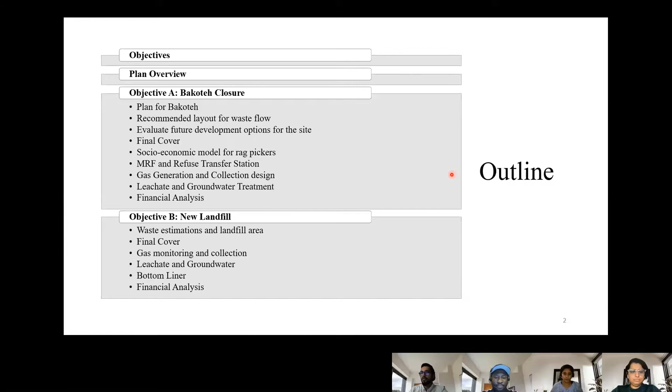For the Bakoteh closure, the most important things are the final cover, MRF station, and the refuse transfer station. The gas generation and collection design will also be considered. For the new landfill, we will have the bottom liner and final cover, along with the financial analysis for both of the objectives.

The major existing problem right now is the Bakoteh dump site, which is detrimental to public health and an environmental hazard. It's a 45-acre dump site, which is a breeding ground for mosquitoes, and two weeks before there was a huge fire on the open dump site.

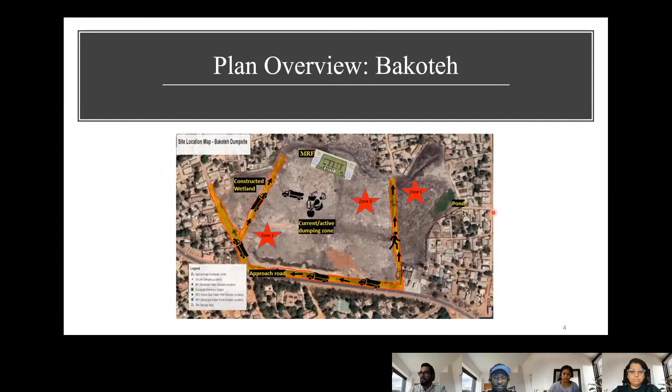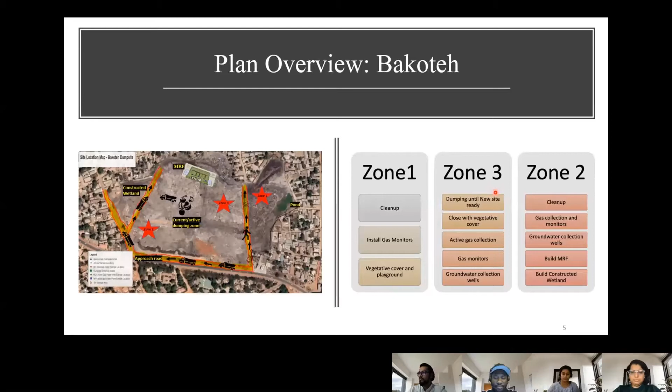In the plan overview, Bakoteh has been divided into three zones, Zone 1, Zone 2, and Zone 3, where in Zone 2 we are thinking to construct a wetland and material recovery facility, and for the existing active dumping zone, we are thinking to cover it and have a gas collection system. In Zone 1, cleanup is necessary along with installation of gas monitors. For Zone 3, we need an active gas collection system and monitoring wells. For Zone 2, we need to develop a constructed wetland and material recovery facility.

Tambana is the only feasible option for us to develop the landfill site, though it is just a 12-acre landfill site. We will be covering the design options in the subsequent slides.

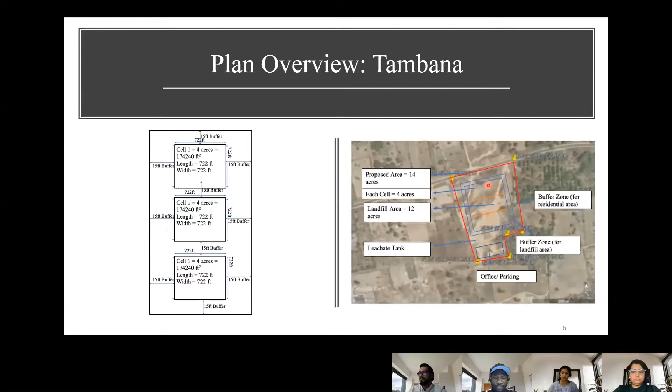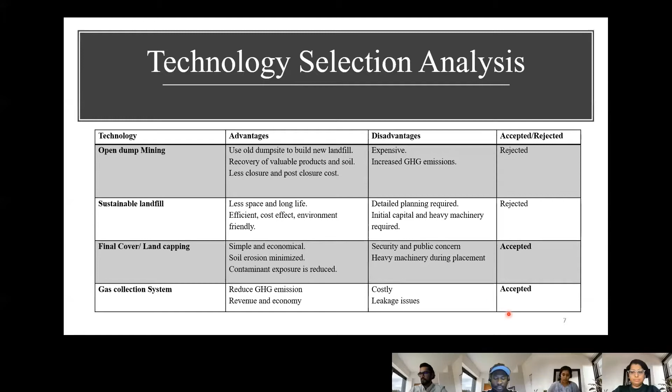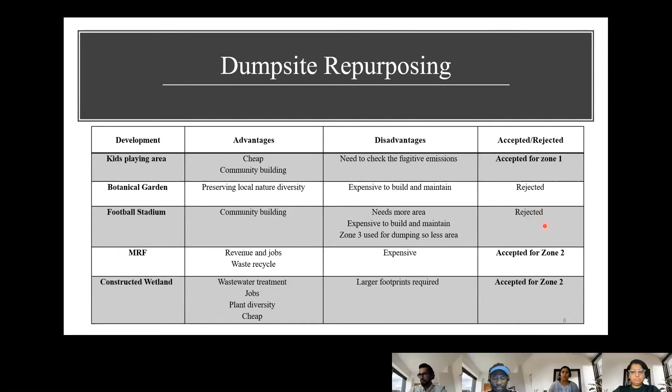Four main technologies were considered on how to use the land after closing the Bakoteh dump site. We considered open dump mining, the sustainable landfill option, a covering or land capping system, and the gas collection system. The land capping and gas collection systems were finally accepted for the Bakoteh dump site. The existing dump site is also going to be repurposed into a kids playing area, a material recovery facility, and constructed wetlands. A botanical garden as well as a football stadium were considered, but we did not accept them for the final procedure.

The final cover of Bakoteh is of great importance. The primary reason is that the existing Bakoteh dump site does not have any leachate collection system. It also does not have a bottom liner. So if water infiltrates through the cover and reaches the waste, leachate is produced and it will lead to contamination of the groundwater below the dump site.

In order to avoid that, we are providing a sophisticated final cover, which includes 6 inches of topsoil and 24 inches of protective layer, a geotextile filter with a geonet drainage layer, a geomembrane, and also a geosynthetic clay liner above the foundation or gas vent layer. It could be costlier, but our primary importance is to avoid any infiltration into the dump site.

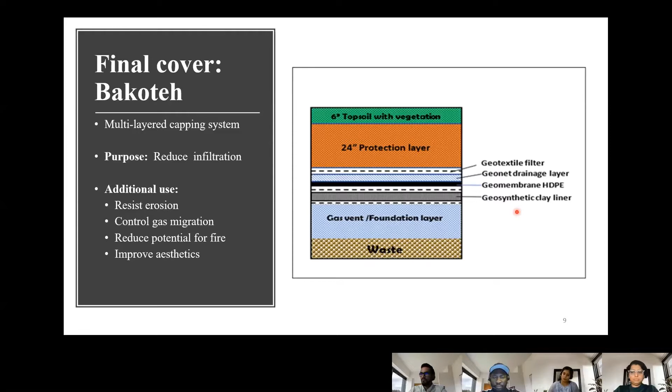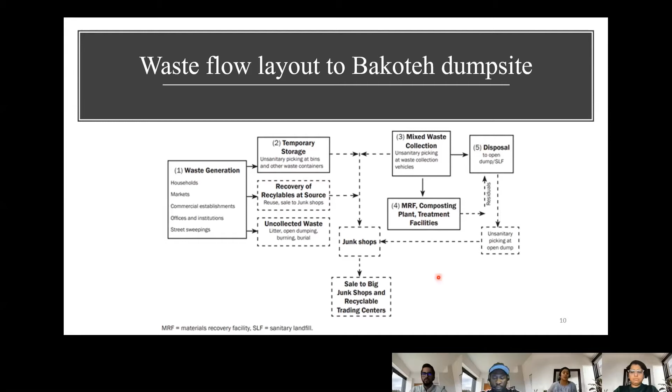The waste that goes to the Bakoteh dump site is mainly stored somewhere as temporary storage, or some rag pickers take it and recycle it. It finally goes to the junk shop, and some of it will be handled using the MRF, whereas the rest will be dumped in the open dump site as of now, and later, when we move to Tambana, it will be dumped in the landfill.

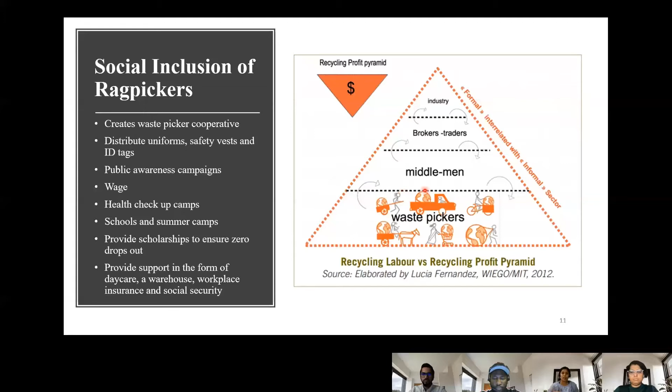It is important to consider the rag pickers who will be displaced when Bakoteh is closed forever. Social inclusion is important because the waste pickers or rag pickers are the people who actually work on the ground picking up and differentiating all the recyclables. It is important to give them cooperative societies or proper healthcare facilities because they are at the bottom of the recycling profit pyramid, whereas they do the most work.

As Ketan discussed, we are planning to have a material recovery facility in Zone 2. The material recovery facility not only helps in sorting recyclables and non-recyclables, it also provides jobs for the rag pickers who will be displaced from the open dump site.

The major portion of the recyclable waste like paper and cardboard could be separated by hand sorting, and we will also be using a trommel screen in the material recovery facility. Later on, when we have more funding, we can add more machines to achieve more fruitful or 100% sorting and recycling of the waste.

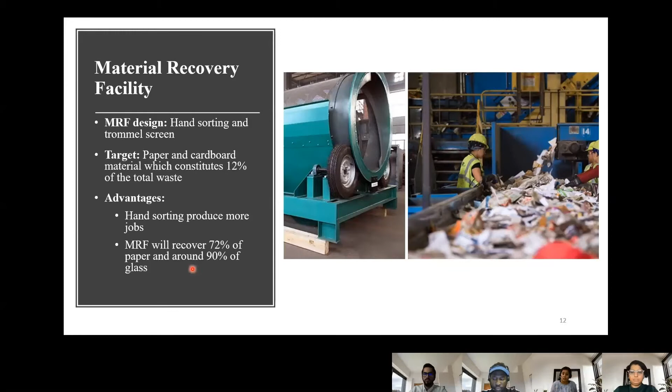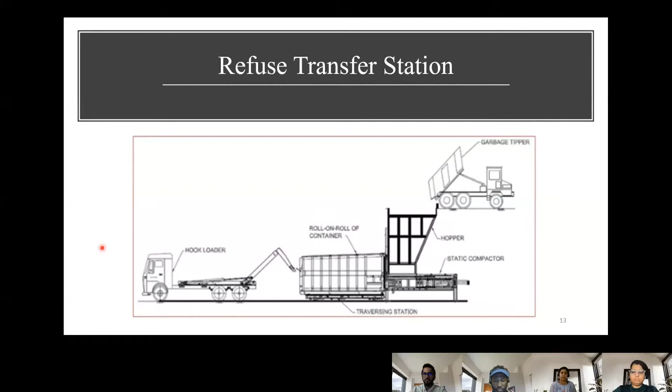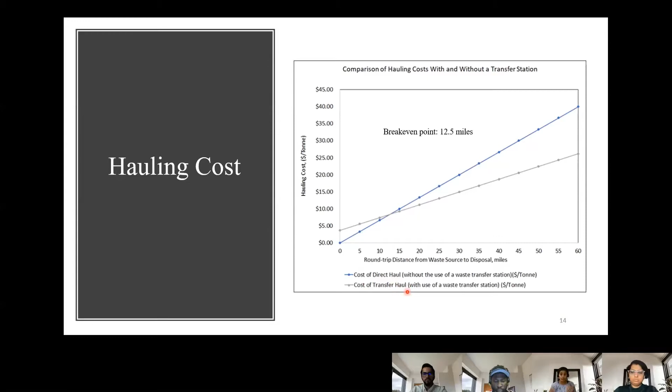Hauling cost is the most important point in deciding whether we require a transfer station or not. The break-even point is 12.5 miles, and from our calculation, the distance between the area of generation and the area of disposal is much greater than this, so we are in need of a transfer station.

In alliance with what my colleagues have said, since gas collection is acceptable at the Bakoteh dump site, we are going to implement a gas collection system. But in order to do that, we need to understand what's going on.

When municipal solid waste decomposes, a huge amount of gas is often generated through a biological process where microorganisms decompose it into carbon dioxide, methane, and other gases. Collection of these gases helps prevent explosion. As my colleague Ketan mentioned, there were fires in the dump sites some weeks ago.

This can be avoided if gas is actively collected, reducing our chances of fire and other fugitive emissions. If these gases are collected, they have to go through a processing facility where toxic gases and gases not useful for energy recovery can be taken out of the gas stream, leaving only methane present at a high purity level.

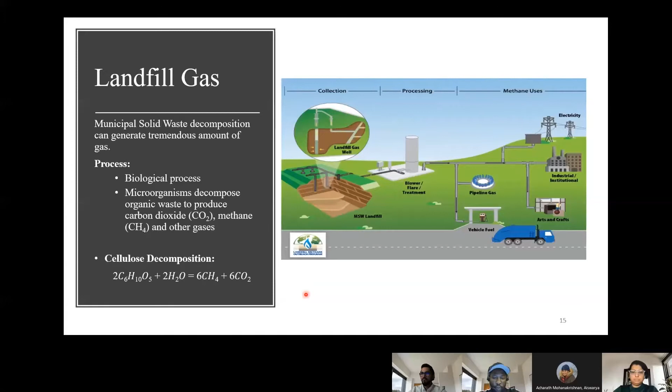Moving on, we have done the gas estimation, calculated for the first year, and also calculated post-closure. We went ahead and calculated the gas estimation rate for 2020, then 5 years after that, which we believe is when the landfill will be closed, in 2025, and then calculated the gas generation rate.

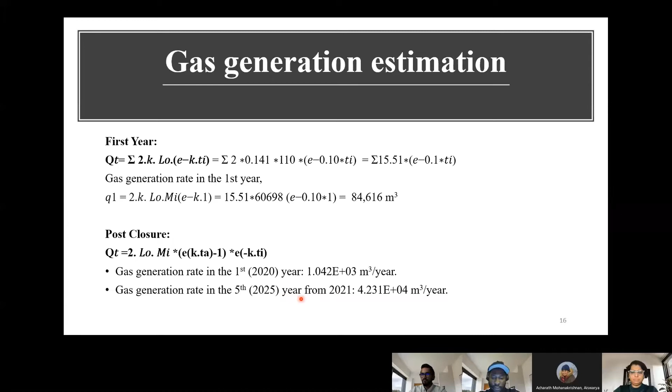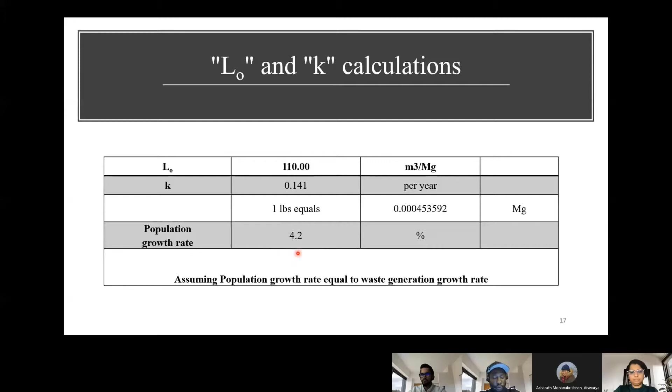We used these factors: the methane generation potential and the methane generation rate constant, along with the population growth rate of 4.2%, which was also used as the waste generation rate.

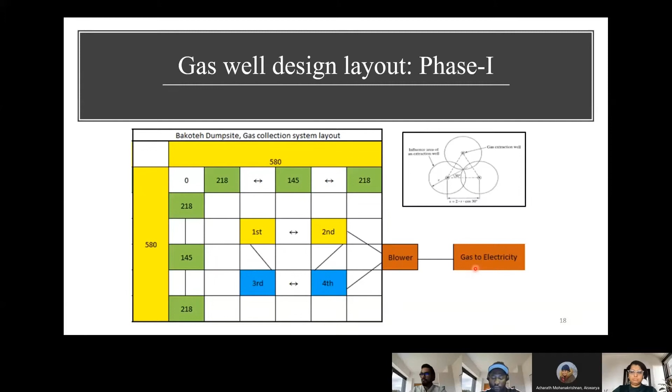We require a buffer zone of about 218 feet. Overall, we designed to put in 8 gas wells, installed in 2 phases: 4 gas wells in the first phase at zone 1 and 2, and then 4 gas wells installed at zone 3 after closure. All these wells will be connected, and gas will be collected from each well and passed into the blower, which can be sent into an energy recovery facility, used to generate electricity, or flared if needed.

For the leachate, we are thinking of constructing a constructed wetland at Bakoteh dump site. The reason for selecting that is because there is a large area in Bakoteh, and the only issue with a constructed wetland is the need for a large area, which we have at Bakoteh.

We do not need to send our leachate or groundwater for treatment to a private lab, thus saving expense. And as Aishwarya mentioned before, it will also generate work for the workers there, so the rag pickers who are getting displaced are going to get work there.

The water produced out of the constructed wetland would then be distributed over the vegetative cover, so we are going to recycle water. Since it's a self-sustaining system, we are going to save money on operational cost as well. It's a very inexpensive solution to this problem.

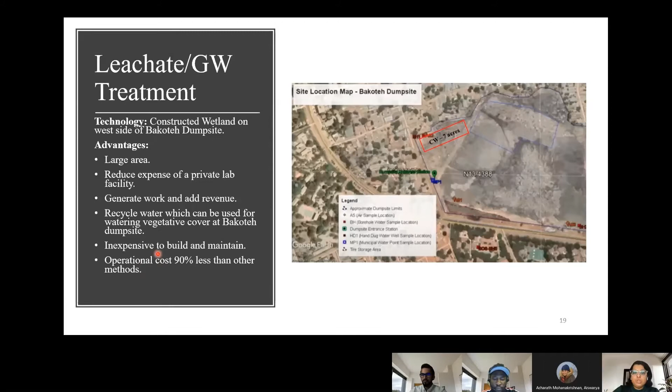Moving on, the wetland design is now being considered for 7 acres, but once the middle section of Bakoteh is closed, we can think of expanding it. For now, we are considering zone 1 and 3, which are the aerobic zones, with 2 days of HRT, which is the hydraulic residence time.

For zone 2, we are thinking of 25 days of HRT, which is the anaerobic zone. For the plants in zone 1 and 3, we are thinking of vetiver grass, and for zone 2, we are considering cattail and papyrus, which are very common in the Gambia region, so it does not add to the cost.

Coming to the groundwater monitoring at Bakoteh, we cannot build the LCRS system, which is the leachate collection removal system, because Bakoteh is already filled, and also there is a possibility that the groundwater there is contaminated.

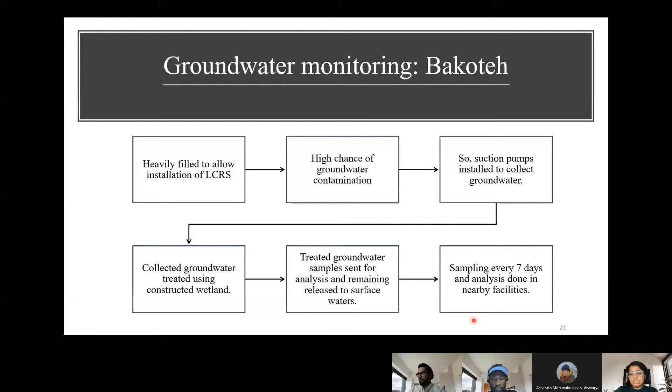So the plan is to pull out the groundwater using suction pumps and then treat it at the constructed wetland, and then take a few samples of that to a nearby facility. After the treatment, we will also take some samples and send them to the nearby facilities, every 7 days.

For the leachate and groundwater quality analysis, as I mentioned previously, we'll be doing sampling every 7 days, and we'll be sending it to two facilities: one is Everpure Natural Pure Water, and the other one is SGS Gambia.

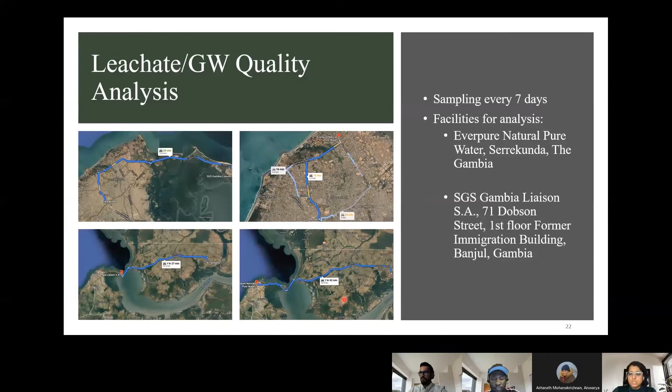Both of these facilities are about 16 to 28 minutes away from Bakoteh and about 1 hour 30 minutes away from our proposed site. So that's why we are going to select this west facility for both of them to treat the leachate and groundwater.

Moving on, if we talk about the financial analysis of the existing dump site, the major crucial aspect was the final cover, because we need to make sure that water infiltration doesn't take place. We also took care of operations, waste and daily cover, and other components like the gas collection system, wetland construction, and material recovery facilities, as my colleagues mentioned.

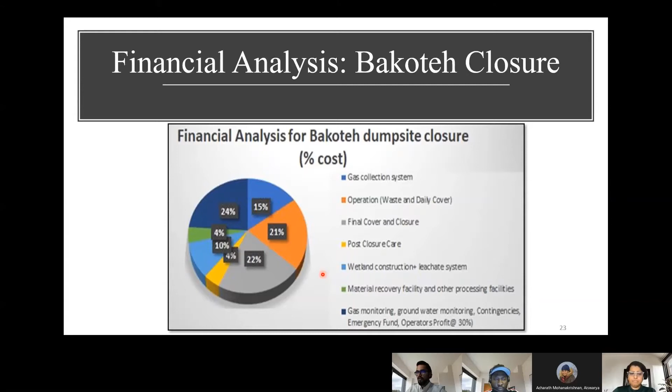The major chunk was 22% for the final cover and closure, and the individual unit breakup is as shown here. The total cost for landfill construction was obtained as $138.46 per square meter, and an overall ballpark value of $18.8 million was achieved. This was excluding the technology transfer fees, the cess, and government taxes.

If we talk about the Tambana landfill, where we'll be having the new development of the scientific engineered landfill, it is a new area, but the most feasible one right now, given the conditions of the Gambian region.

We started with the projection of waste generation. It's a decadal waste generation shown on the right side from 2001 to 2010, with a growth rate of 4.2%. The first year population we estimated as 1 million, and the area required is 48.4 acres.

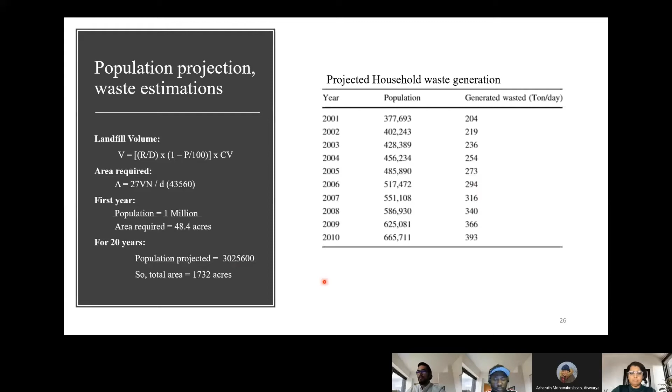Keeping this area requirement in mind, we are not sending all the waste to the Tambana landfill. We will be diverting waste to the material recovery facility as well as other processing facilities like vermicomposting and other biodegradation areas. For the next 20 years, the projected population is 3.02 million, while the total area required will be 1732 acres, and again diversion will take place.

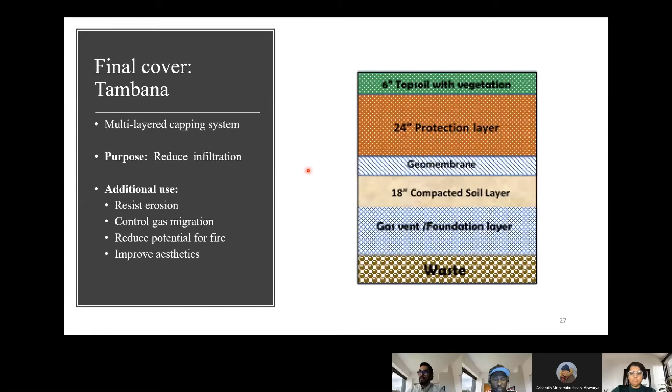If we talk about the final cover of Tambana, the most important thing is the geomembrane, and we are not having as thick a layer of geomembrane as we have in Bakoteh, because this is a sophisticated landfill and it will have a bottom liner as well as checks on leachate treatment and collection.

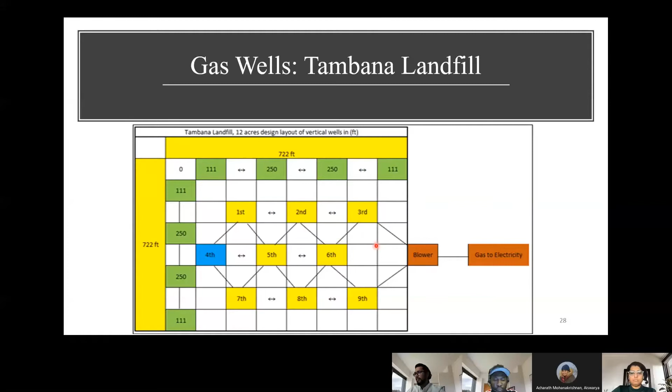If we talk about the gas wells, the Tambana region will have an area of 722 by 722 feet square. We're having a buffer of 111 feet, and there will be a total of 9 gas wells obtained based on the formula mentioned by my colleague OP. We will be collecting the gas to the blower, and the blower will be sending the gas to the electricity grid.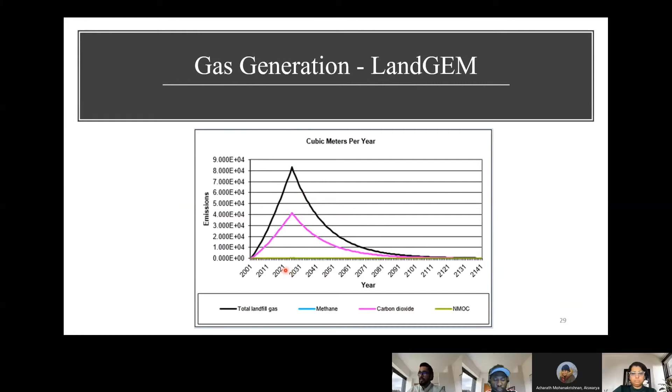If we talk about the landfill gas results, the overall gas generation came out to be 8 times 10 to the 4th cubic meters per year, which is a fair amount that we need to take care of, because if you see from the graph, in 2025 the methane generation is 50% of the total gas generation.

So for the leachate collection and removal system at Tambana, we are planning to build the leachate collection pipes parallel to the orange lines shown, and then there'll be a perpendicular line connecting to those leachate pipes and taking it to the leachate tank, which will be next to the office and parking, as shown in the image.

We'll be collecting the leachate using the sumps. We'll be storing it in the Tambana storage tank, and then transporting it to Bakote for treatment.

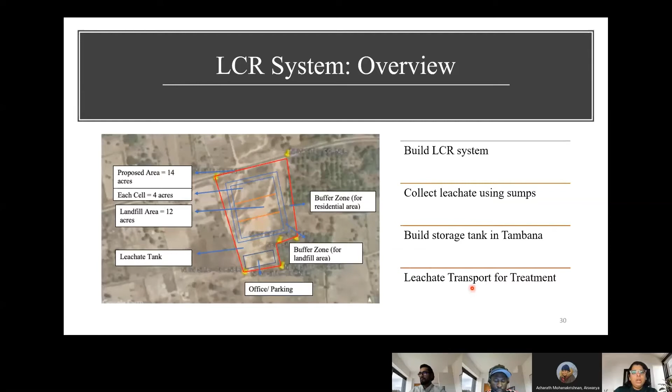For the leachate collection system, we have used two drainage layers: the GeoNet and the GeoTextile, with a leachate collection rate of about 60 gallons per acre. For the GeoNet, we'll be using a biplanar GeoNet design material which meets our requirements.

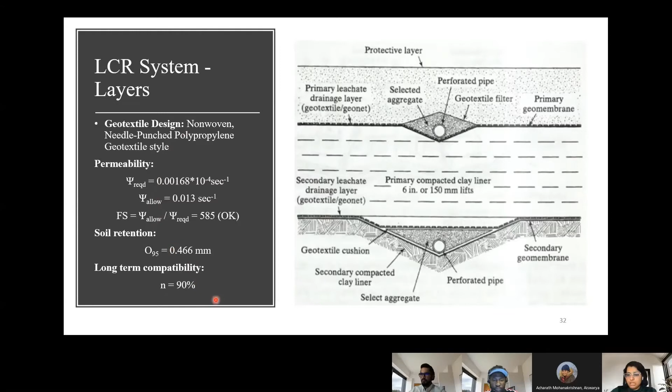For the geotextile, we'll be using a non-woven needle punched polypropylene geotextile style. It'll have a soil retention of 0.466, and a porosity long-term compatibility greater than 90%, which also meets our requirement.

Coming to the pipes, they will be placed on a sloping surface of 2%, and the pipes themselves will be placed at a sloping surface of 1%. The reason for doing that is it allows gravity to do its work for the free fall of the leachate to the sumps, and from sumps to the storage tank.

Thus, we do not have to use pumps to pump out the leachate and save money. We'll be using HDPE SDR 11 for the pipe material, and for the holes in the pipe, we are thinking of only one hole on either side, to maintain less than 12 inches of leachate head in the pipes.

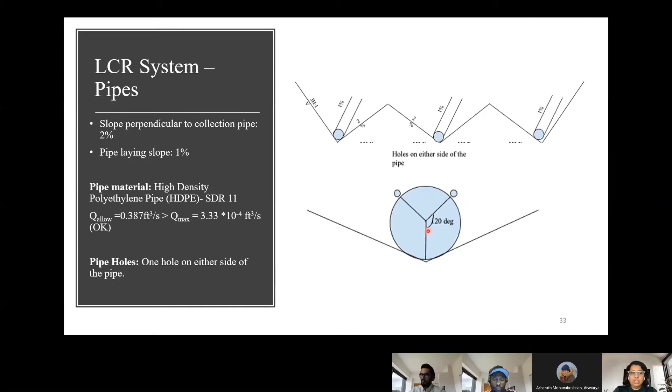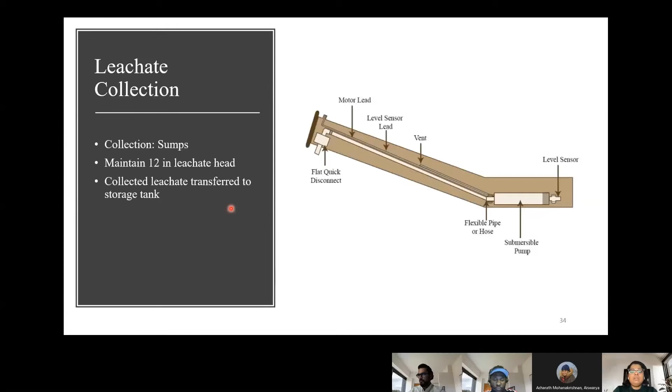For the leachate collection, we'll be using sumps which maintain the previously mentioned less than 12 inches of leachate head, which is a requirement. It will then transfer the leachate to the storage tank, which will be placed at Tambana.

For storage, we'll be using XLPE cross-linked polyethylene tanks, which are very durable, do not corrode quickly, and do not get damaged easily. We'll be using a 4,000 gallons capacity tank, and transport the collected leachate every 10 days using a septic truck with a capacity of 3,300 gallons.

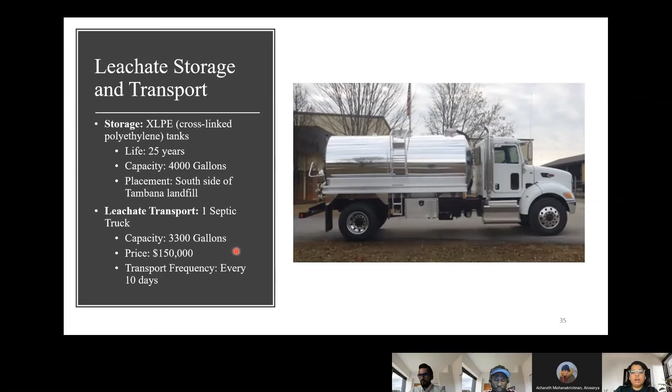We'll be using just one septic truck to save on cash. Since we are transporting every 10 days, that should be sufficient.

At Tambana, in order to check the groundwater integrity, we'll be collecting samples of the groundwater and would have groundwater wells installed using the direct push well method. We're going to use a low flow purge collection method.

We would have pumps in these wells which could be connected to either solar panels or biogas energy, using low energy requirement pumps. The sampling frequency will be every 7 days, and if contaminants are found, a 90-day continuous sampling analysis showing contaminants within permissible limits will be done.

And then, like my colleague mentioned, we would send those samples to facilities nearby, which will be SGS and Everpure.

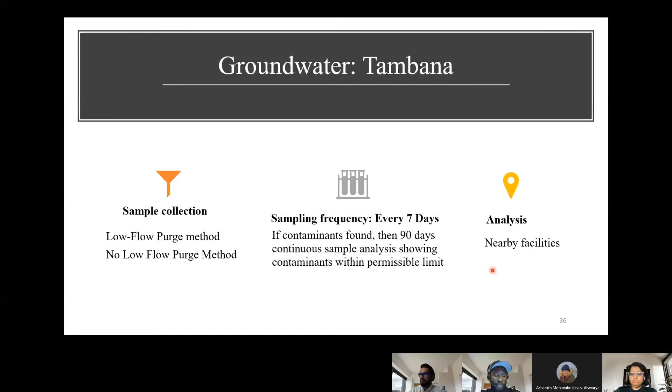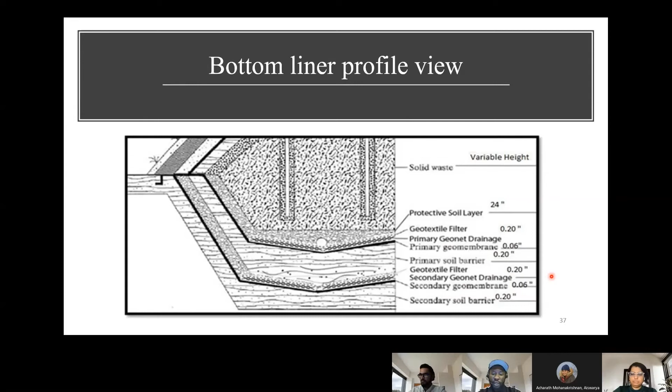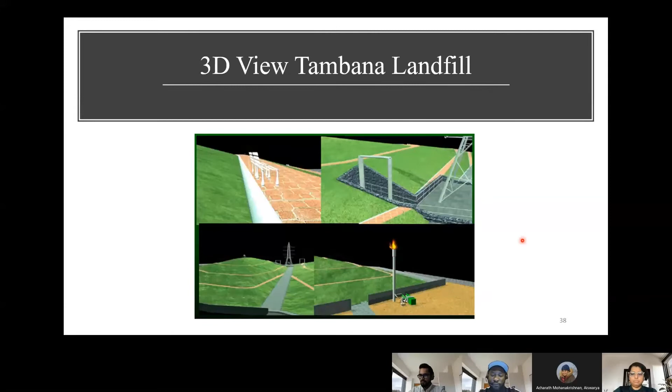This is our team: Sonakshi, OP, and Aishwarya presented with me. Mithila, Hussain, Asma, and Dravid gave considerable effort for this presentation, as well as the report and poster. Thank you very much.

We appreciate your time. Thank you.

Well, I can go first. I have some questions here. Well, first, thank you for an outstanding presentation. Really appreciate the thoughts that went into it and all the calculations and details. My questions, I'll ask two questions.

One is the leachate. You mentioned having a transportation system going from Tambana to Bakote with the sample equipment that you saw that can transfer the leachate. My question is, why would you do that when Tambana is going to be engineered, moving the leachate from an engineered landfill to the dump site, which is in a higher population density area? So that's my question for that one.